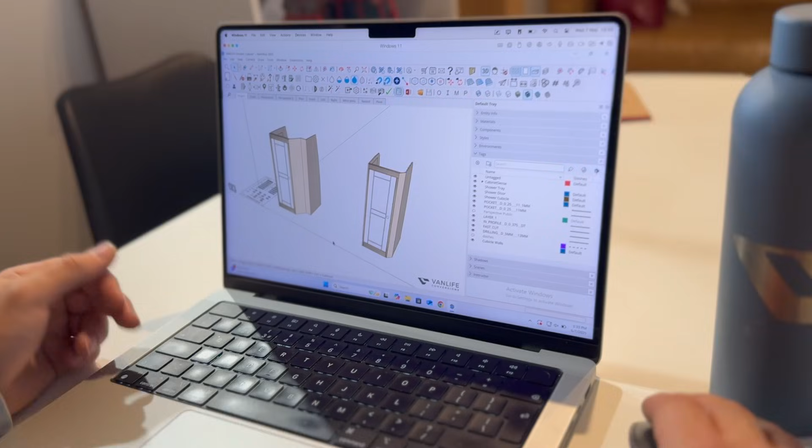What we'll do is we'll have a look inside the van at what this looks like inside the cubicle, and also a bit about the design process on the CAD, and show you some different shapes of shower tray. Looking at the SketchUp model here, I've got two examples of different shower cubicles. The one on the left is for our Volkswagen Crafter, and the one on the right is for the Fiat Ducato that we've seen inside the van.

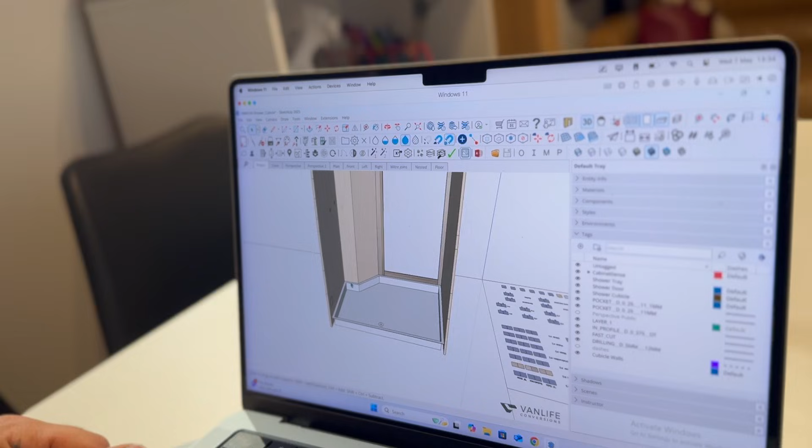One of the benefits of the stainless steel tray is we can actually make the shape of the tray to fit the size of the cubicle exactly. So you can see it lines up with the edges of the shower cubicle, meaning that you don't have to build additional bits of platform and waterproof those. Your entire shower cubicle floor is covered by a tray, which is really good.

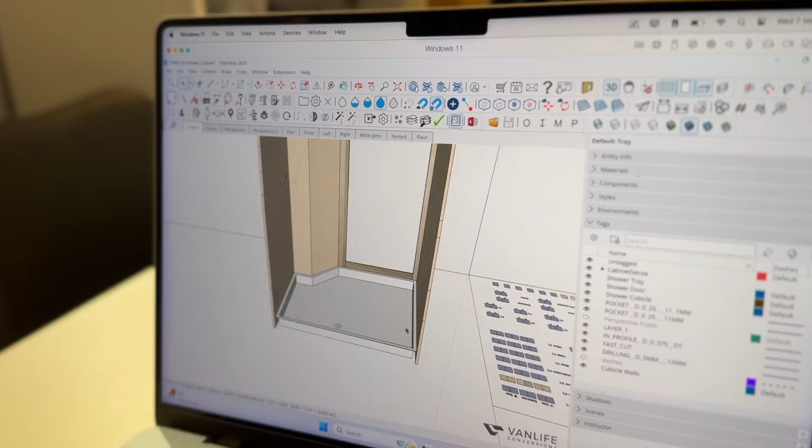As previously mentioned, the waste position, we can change that to suit the chassis members of the vehicle underneath the van and where the shower cubicle is going to be located. But yeah, it's really useful to be able to draw the shower tray in this SketchUp software, and we could then forward that shower tray to our fabricator to have fabricated and sent back to us ready for powder.

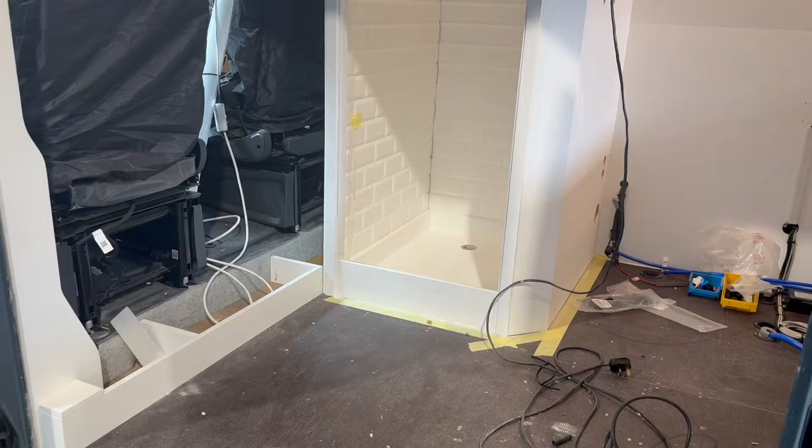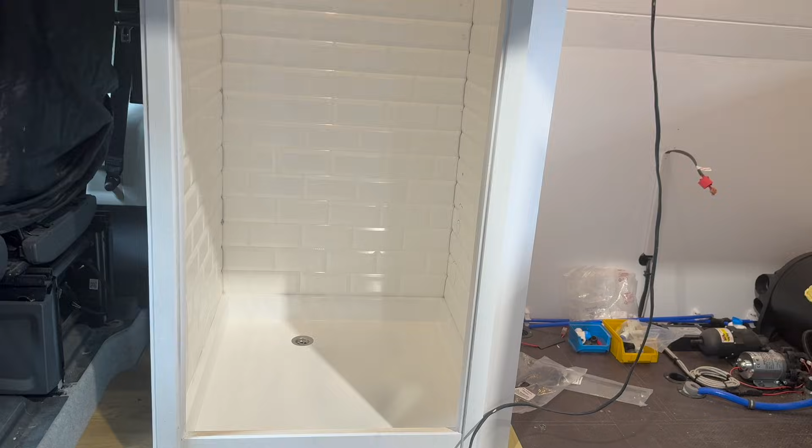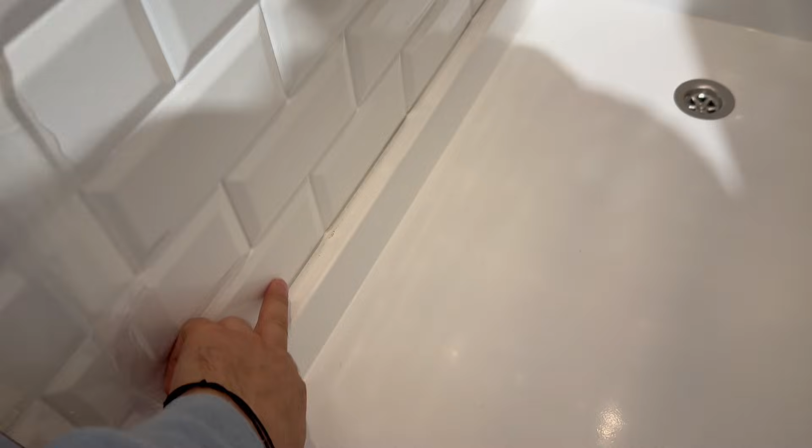So looking at the Fiat Ducato, you can see the shower cubicle has been built out. We've put the Rico style wall panels in to look like metro tiles, and you can look at the shower tray here and in practice how it fits within the cubicle. Because it's a custom stainless tray, you've got maximum floor space, and the panels on the side, they sit on top of this flange here. There'll be a bead of silicone, obviously. Minimal risk of leaks, no risks of any cracks happening, because it's obviously very durable material.

And then the waste drain there obviously can be located where you wish, where it fits underneath the van, missing the chassis members. So yeah, really happy with how it fits inside this cubicle. Let's go and have a look at the Crafter at the different shape.

So looking into the Crafter conversion, you can see the shower cubicle's been built out. This is a slightly wider shower cubicle with a different shaped angle piece on it. The customer wanted a big cubicle so that their toilet could remain in the shower, fixed in whilst they're using it. Obviously looking at the shape of the shower tray, you can see there's no lost floor space inside the cubicle. It fits to the wall shape nicely, just needs a little bit of silicone to be finished off.

Again, we're using the white Rico metro panels, and this customer opted for an additional bit of storage inside, so we've put a little niche on there. So yeah, hope you found it useful. Again, just showing you the shower trays that we have made, and how we fit them into our conversions. Thank you for watching this video showing why we use stainless steel shower trays in our van conversions.